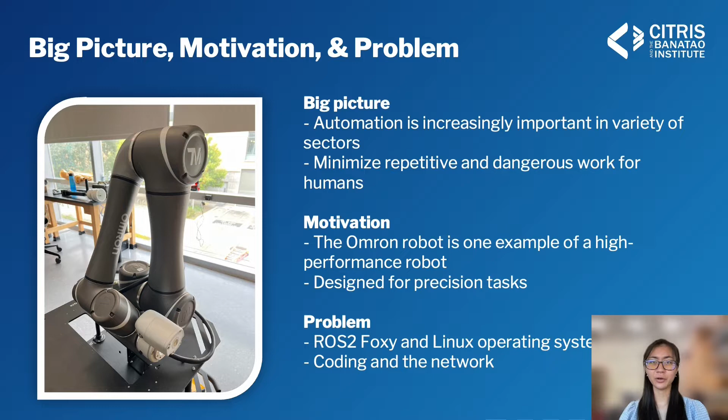In Dr. Stefano Carpin's lab, I explored this challenge by using ROS2 Foxy. Since it is a new operating system, there is a lack of learning resources. Moreover, it was my first time learning and understanding the network connection between the program and the actual robots.

For the technical contribution, I used ROS2 to launch the robot in two simulators. Gazebo provides an environment that mimics the real world, while RViz2 is for robot motion planning. Over the course, I was able to successfully spawn the robots in the simulators, which allowed me to visualize a graph that explains the network connection between the systems. I also documented ROS2 experiments for future use in the lab.

Since this summer was quite short, I was not able to complete all my tasks. So my next step is to visualize this OMRON robot on top of the Husky, and then create Python code that allows me to move the joints on the actual robot. This summer program allowed me to see myself in a bigger picture, that I want to continue doing research in robotics where I can apply AI and science together to create robust robots for the future.

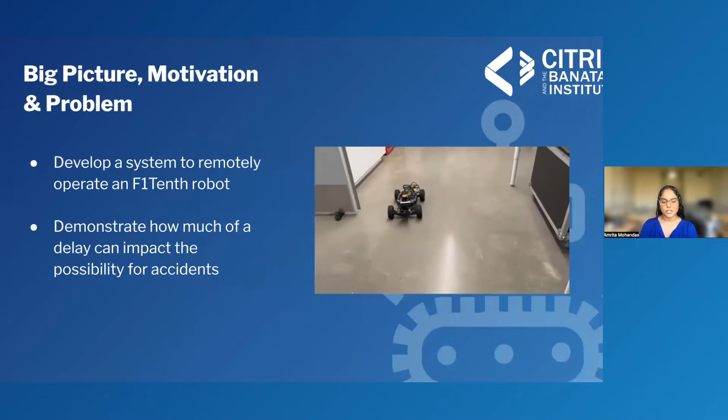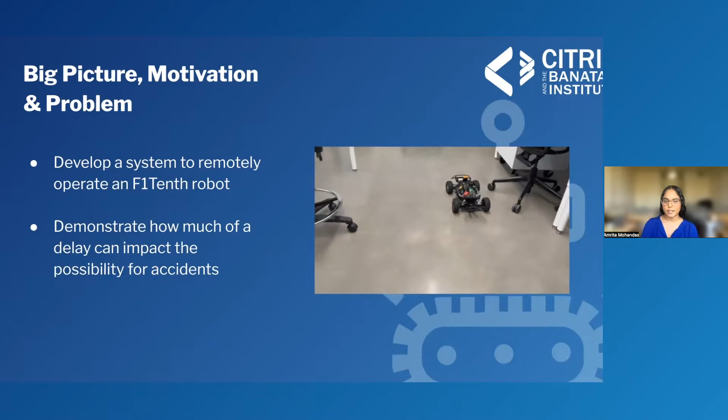The aim of this internship was to develop a system for remotely operating an F1Tenth racing vehicle, and such a system could be used to demonstrate how much delay in the transmission of data between the robot and the remote computer can impact the possibility for accidents when trying to remotely operate real-world road vehicles.

The start of my internship was mainly focused on learning about ROS, or Robot Operating System, which is a software framework with lots of libraries and dependencies that allow different components of a robot to communicate with each other simultaneously.

Using the robot's LiDAR sensor and odometer, I was able to develop an algorithm for automatic emergency braking, which was an essential first step in preventing the robot from incurring any damages when testing algorithms in the future.

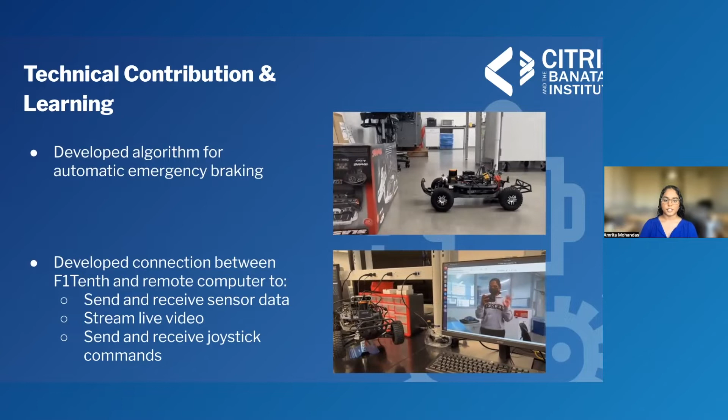Using existing ROS libraries and dependencies, I was able to develop a connection between the F1Tenth and a remote computer in order to send and receive sensor data and joystick commands between the computers, and also send live video and stream it to the remote computer from the robot's camera for ease of teleoperation.

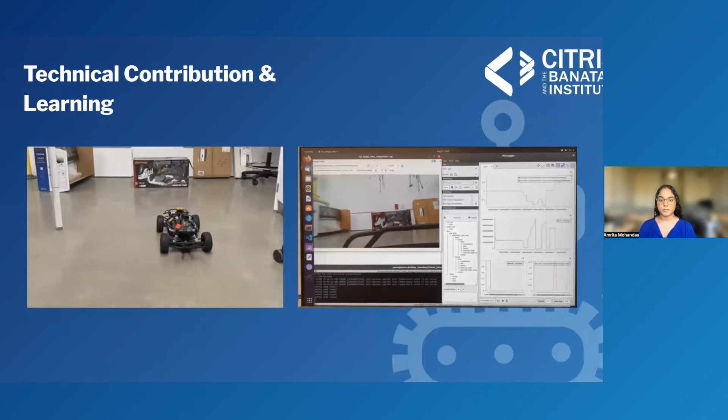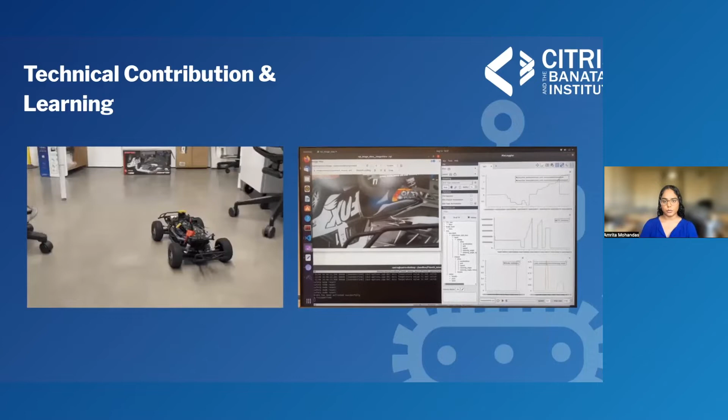Here is the system working as a whole, and on the right, you can see the perspective of someone operating the car from a remote computer using a joystick and using the video streamed from the robot to the remote computer.

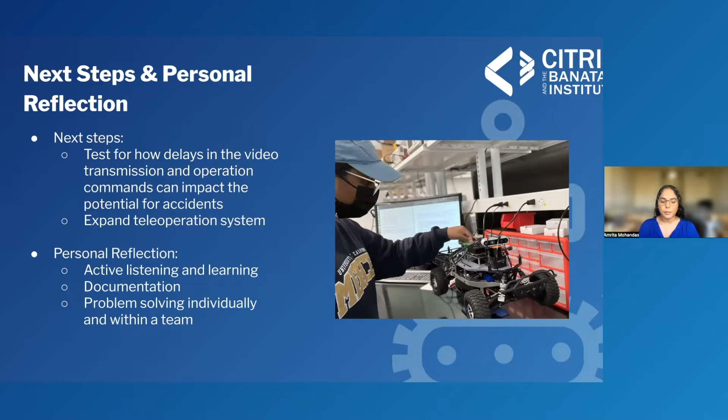In the future, we hope to test and collect data on how delays in the video transmission and operation commands can impact the potential for accidents, and potentially expand the teleoperation system further. In this internship, I learned a lot about active listening and the importance of documentation when it comes to preventing problems from occurring again and again within a project. I also learned a lot about problem solving as an individual and within a team.

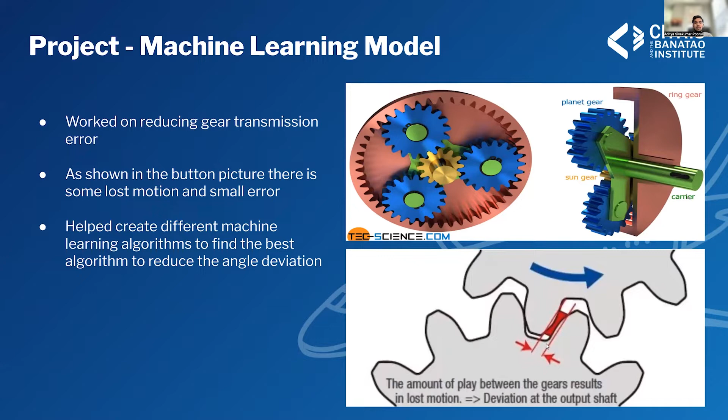I had a couple challenges during the internship. Coding in the real-world environment is very different than university classes. In university, we have test cases to make sure our code works, but in the real world, there's no test cases, so we had to make our own simulations.

Also, learning the knowledge necessary to complete the task took a while because it was completely new things I have not experienced or learned in university.

In the real world, everyone is in different time zones, so meeting with the teams in India, I would have to take meetings at 9 p.m. Pacific Standard Time. Time management was a big issue for me since I'm taking multiple classes and doing other things on the side while maintaining a full-time job.

I would like to say the experience was great and I learned a lot about how the future of my career is going to be.

As my internship comes to an end, a few improvements left to do on the UI design side of things is to make the design colorful and make the sliders smooth.

In regards to the machine learning project, the next step is to do research and fine-tune the algorithm to get the least amount of error. For future people taking over, there is documentation from Figma designs and GitLab history logs.

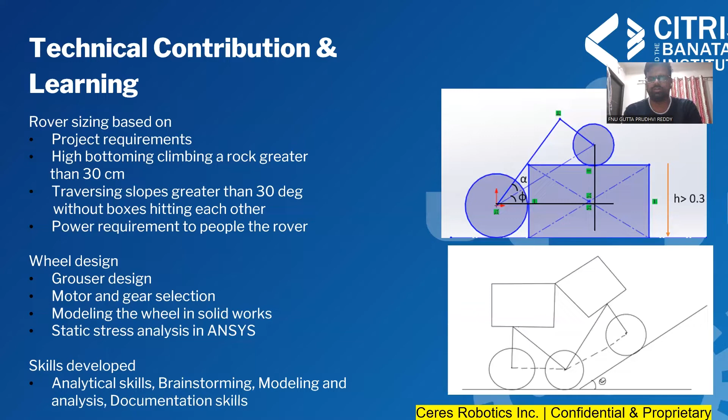This project can be further extended by conducting thermal analysis of the wheel using ANSYS for radiation on the moon, and the axle design for the wheels has to be done. Further, the model can be 3D printed and tested, and with these results, the design can be further improved for exploring the moon.

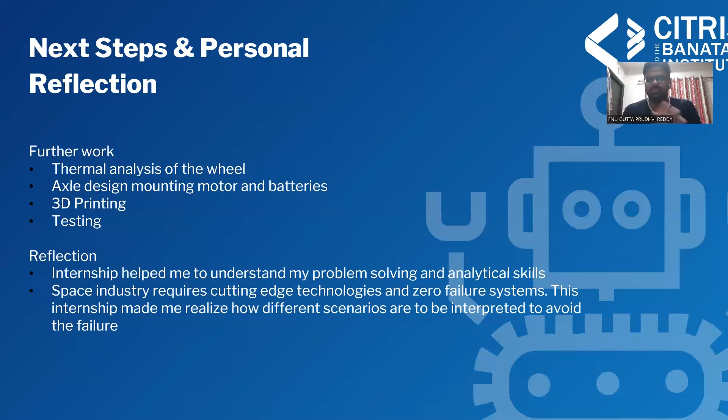The major reflection during this internship was understanding my problem-solving and analytical skills, and also realizing the space industry is a cutting-edge technology and a zero-failure system. I was able to realize how different scenarios can be interpreted to avoid failures in the space industry. Thank you.

The big picture for this project was we wanted to create a report and catalog to showcase the various robotic research labs and related courses in the Bay Area. We also were able to include demographic information, STEM economics, and different opportunities that community colleges offer in STEM.

The big motivational factor for this project was we wanted to help high school students, undergraduate students, and graduate level students stay aware of the possible research opportunities and courses that are out there. We also hope that this report can be a connection and collaboration point between universities, robot research labs, and industry partners.

The problem that led us to this project was that there's a lot of groundbreaking research being conducted, but it's all found through universities. So we wanted to create a place where all these research opportunities could be showcased.

One of the case studies that was included is Dr. David Quintero's research lab, the Control for Assistive and Rehabilitation Robotics, the CARE Lab at San Francisco State University, where he works on prosthetics and exoskeletons.

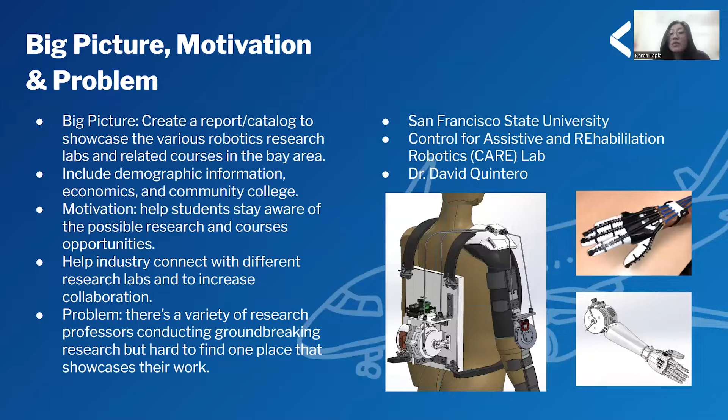Some of the challenges through the internship was finding all the information about the labs and courses, and also what helped was looking at different reports that already exist and seeing what information should be included in this report. There was a lot of data collection, proper research, lots of communication and outreach to different professors. In the end, I was able to get around 13 to 14 professors to participate.

A lot of the skills learned in the internship were different forms of proper communication, planning, prioritizing, multitasking, and problem solving. In the big picture, I was able to learn a lot about the different robotics research that's being developed and the technology that's being created.

Next steps, we hope that this report will be updated yearly, and we hope that there's more participation from different professors so that the resource can be a greater use.

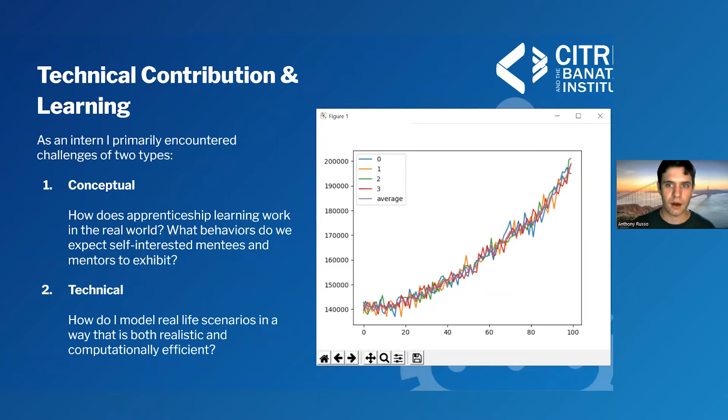During my internship, I was able to complete the single agent scenario, which allows students and professors in the simulation to only work on projects individually. However, this work provides much of the functionality required for the upcoming multi-agent and planner scenarios, which will see agents working together and finally under the management of a planner organization.

Next steps. I have agreed to continue to work with the lab as the project lead going forward, which means I have a few tasks ahead of me. First, I will need to fully flesh out the project's documentation, most of which has already been completed. Second, I will need to train new team members, one of whom has already joined me and we are continuing to onboard him.

Third, the team and I will need to complete the multi-agent and planner scenarios as previously described. And finally, as a research team, we hope to publish a research paper under Dr. Lee's advising before the end of the coming school year.

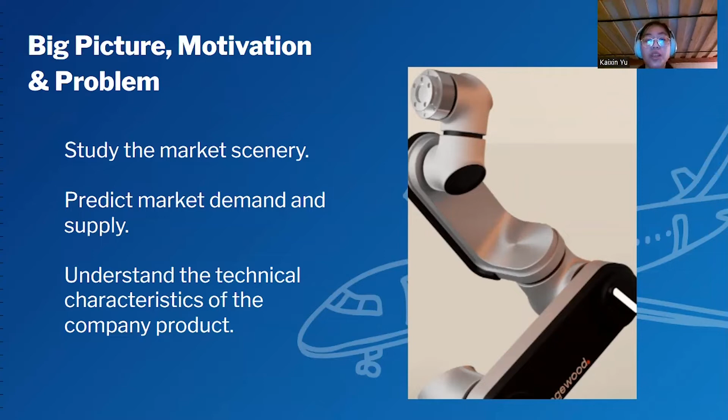So I needed to study the market scenario of the company, predict market demands and supplies, as well as understanding the technical characteristics of the company product, which is a robotics arm shown in the picture on the right side of this slide.

The technical contribution and learning I was able to provide and gain from this internship were to conduct research to find data and provide answers to my supervisor's questions and add data to our system, determine the appropriate ways of collecting data in collaboration with the team, and finally develop, update, and put into practice research methods and procedures that work best for me and the team.

The next steps and my personal reflections from this internship experience are to become more aware of the client's request of the topic research, which in this internship were the research topics that my supervisor was providing me during the internship, and I needed to collect data and research about as well as analyze them.

The second improvement and takeaway from this experience was to improve the data organization and analysis so people can better understand the data I collected when they were reading it.

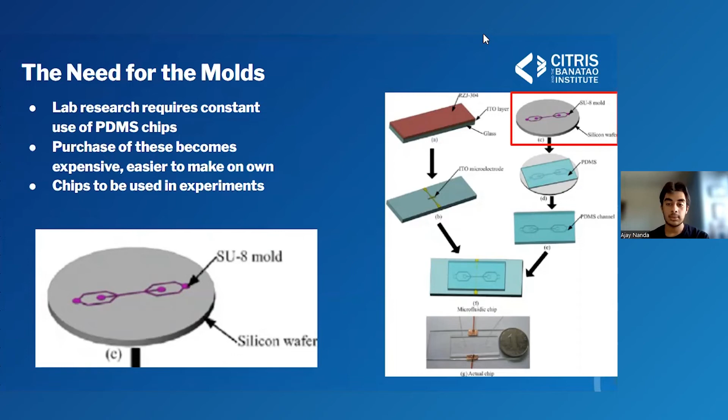The first question I need to answer is what challenges did I have and what problems did we aim to solve. Our lab needed constant PDMS chips for various experiments, and it's very expensive to keep buying new chips, so it becomes easier to make them yourself. But to do this, you need to make molds for the chips to be printed in, and that was my primary job this summer: making these molds to help the lab run more efficiently.

The biggest lesson I learned from this was how I was able to use my old designs to improve my future ones, and also take aspects of the old ones in order to create the new ones faster.

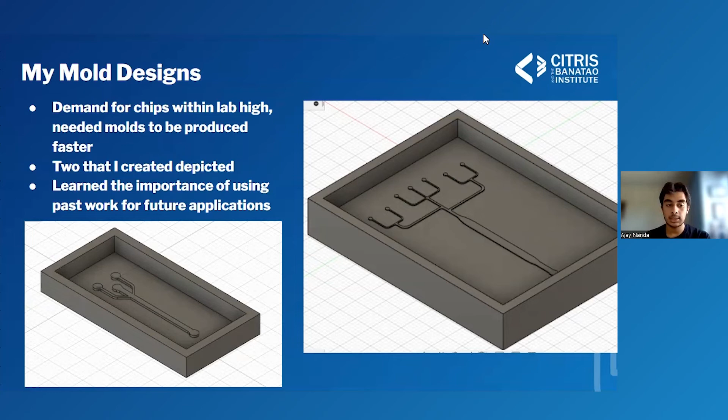My reflection on the future is that I hope to explore the hardware aspect of chip design, since I did more of the mechanical side by designing them. I hope to continue working with semiconductors in the future. I'm an electrical engineering major, so this is probably something I'll come across again, and I want to learn more about chips since I also live in Silicon Valley, the home of semiconductors.

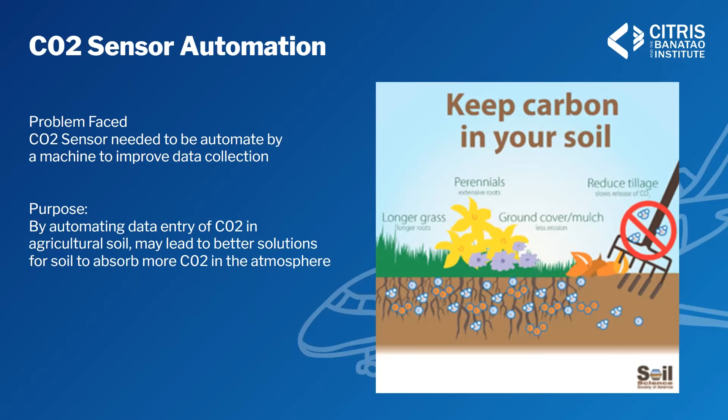...we could create new ways that the fields would be able to absorb CO2 from the atmosphere and place it into the ground. By doing this, we'd hopefully be able to reduce some climate change by having less CO2 in the air, with it stored in the ground instead.

My job was to make a mount that would attach the sensor to the motor and the motor to the rover. By having this, we'd be able to automate the process instead of a person doing it. It would be a robot pre-programmed to go to selected destinations, drive there, lower the sensor, analyze the data, raise it back up, and repeat.

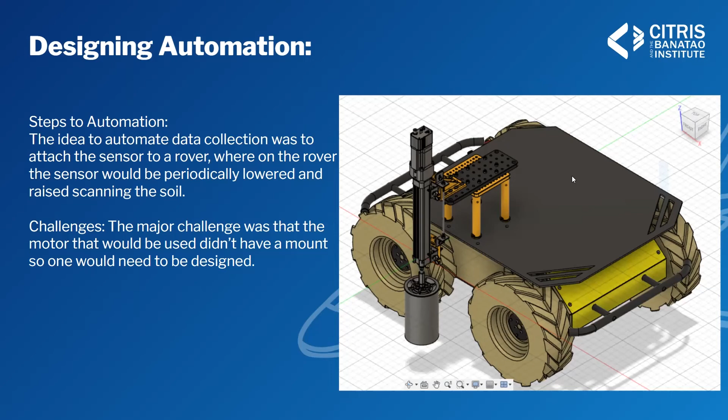After the design was made, I created a parts list. The parts were looked at and then ordered. When the parts arrived, I was able to physically build the motor mount, and this is what it looks like right here.

Next steps would be to reduce the price of this mount by reducing the number of pieces, reducing the cost, and hopefully making it easier to build next time. The idea would be to have multiple rovers with a CO2 sensor attached to each, so we'd be able to vastly improve our data entry instead of just having one motor.

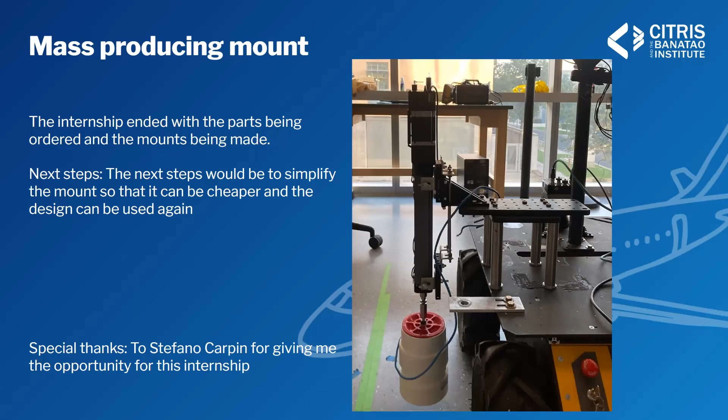Hi everyone, my name is Wendy Chen, and I'm a third-year at UC Santa Cruz majoring in computer science game design. This summer I interned at Yannick Lab, where my internship was around making photolithography mask designs and 3D visualizations of chips in AutoCAD.

The focus of my internship was around the most economical way to fabricate a chip. So I created mask designs for fabrication shown on the right here. These designs would be used for biosensing projects or for designing lab-on-chip systems.

My technical contribution was making those mask designs, which involved learning CAD, part of ImageJ, and image processing software to help get the measurements of the chips. Right here, I measured the diameter.

The first length was given in pixels, and since I knew the distance was 1 millimeter, I could set the scale based on that to set the length. So I got 1 millimeter the second time I measured it. Using the scale, I can measure other parts of the chip, like this diameter, which I got 3 millimeters, to get the other dimensions of the chips for making the designs.

I also had some time to work on 3D models of different objects, like an interdigitated electrode sensor chip shown on the left, and also an experimental setup where we pipetted solution into a reservoir. Using an electrical field, we can accumulate polarized particles on the chip to detect proteins and bioparticles. These models also help show figures in a presentable way, which will be used in manuscripts.

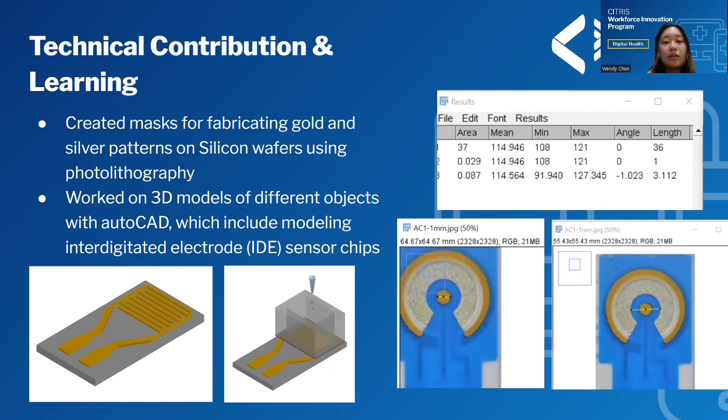During the fabrication process, you selectively expose certain regions that you want to fabricate on the wafer. Then when the UV light shines on the surface, the areas that are interacting with the light will go away, and then it leaves this in the end.

These chips will be taken out individually to be tested on and used to design biosensors, point-of-care diagnostic chips, or lab-on-chip systems. For future designs, I'd also be able to create any type of mask design and models in AutoCAD.

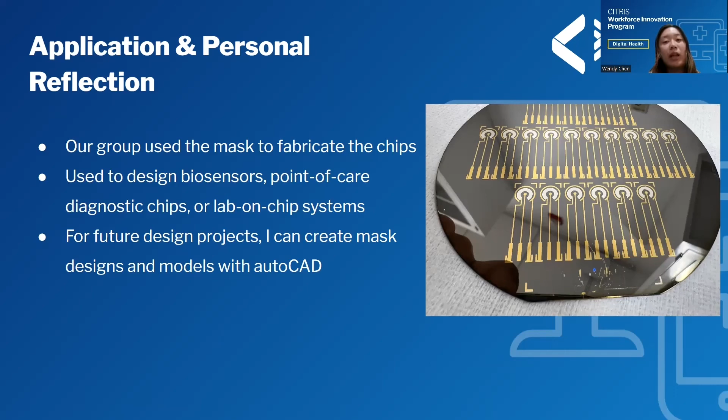My name is Carl Vincent Cuyos. I am a fourth-year robotics engineering student at the University of California, Santa Cruz. This summer, I interned for the Autonomous Systems Lab under Professor Gabriel Elkaim.

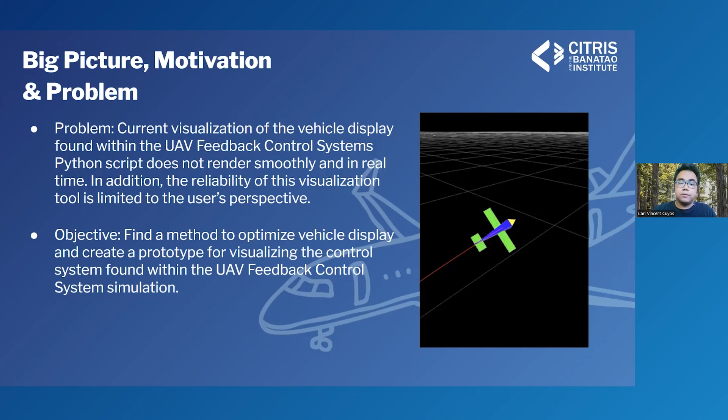The big picture motivation and problem that I tackled this summer is that the current visualization of the vehicle display found within the UAV feedback control system's Python script was not able to render smoothly and in real time. In addition, the reliability of this visualization tool was limited to the user's perspective and their understanding of the programming itself. So the objective was to find a method that can optimize this vehicle display and create a prototype for visualizing the control system found within the UAV feedback control system simulation.

The technical contribution and learning that I did this summer was that I created a method to execute parallel simulation using pseudo-Z buffering to improve graphics rendering efficiency by 80%. I also designed multiple iterations of a miniaturized RC plane using SolidWorks.

I also received feedback from mentors and colleagues about the optimization and visualization tasks throughout the internship duration. And lastly, but not least, I successfully controlled each servo on the prototype RC plane to validate the proof of concept that I made, as seen on the right.

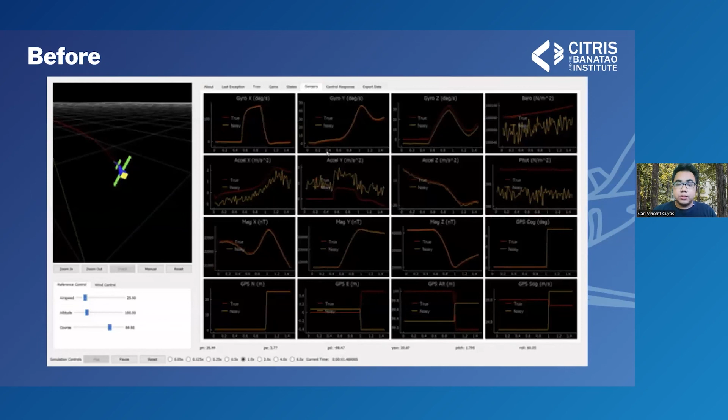This is the simulation before the optimization patches, where, as you can see, the plots were not rendering very smoothly and very slowly, as well as the vehicle display. Afterwards, with the visualization patches, you can see that all the plots are rendering in real time, as well as the vehicle display.

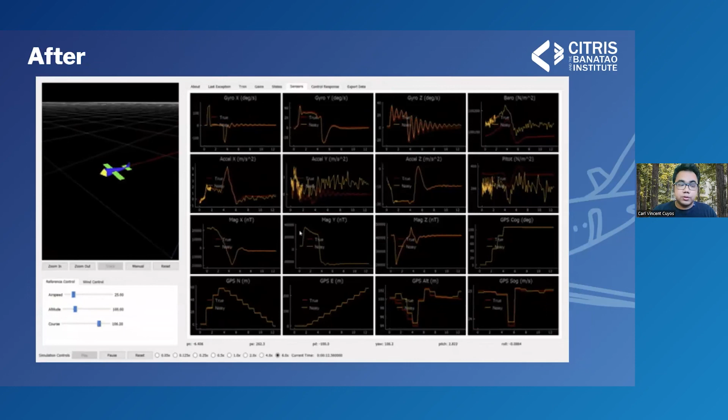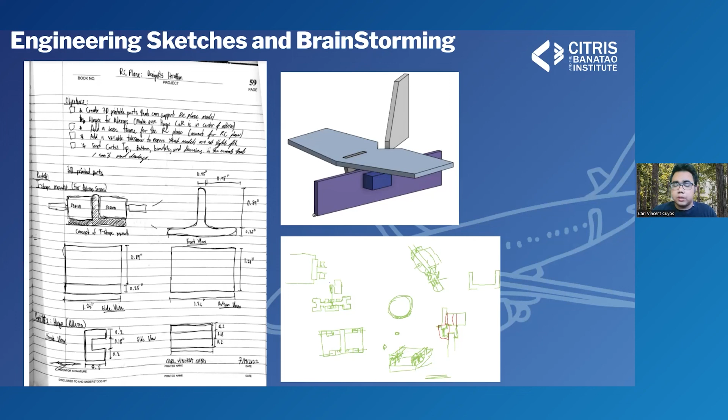Here's some engineering sketches and brainstorming that I did for this internship. You can see my notes about the RC plane, some renditions, and even discussions of how to assemble the RC plane itself that I discussed with my mentor.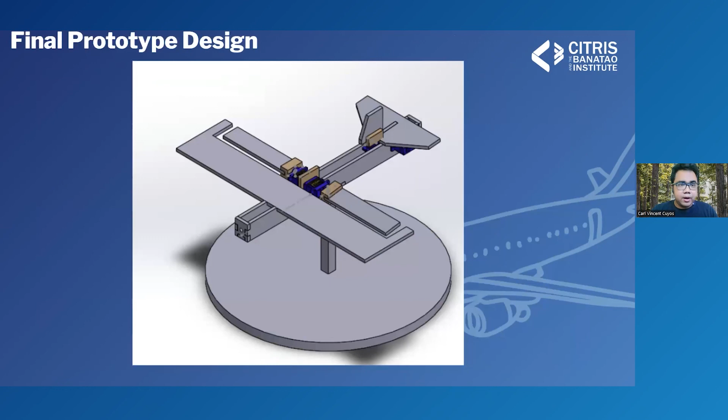Here's my starting prototype design with very unpolished ideas, and lastly, my final prototype design with a little bit better assembly of the control surfaces and its RC servos.

And lastly, but not least, I also want to improve the current RC plane prototype by finding ways to manufacture it for class use and even publicizing it.